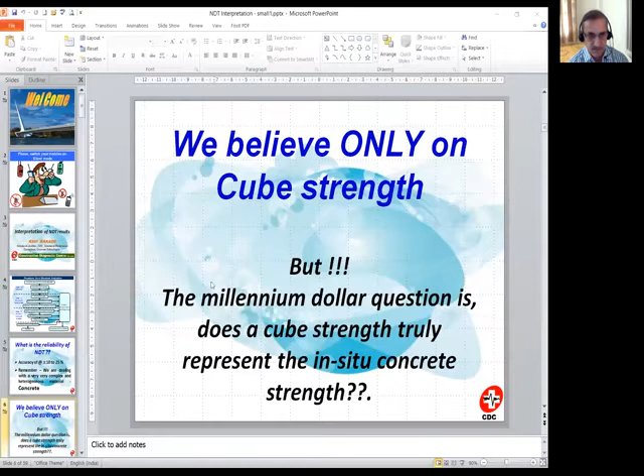Okay, hello, welcome you. Can everybody see me? Okay, I will straightaway start with my presentation. Okay, welcome and good afternoon, everyone. Hope today we don't face any technical issues.

Today I'm going to discuss mainly the interpretation of non-destructive testing results. Why have this session? I've been practicing in this field for more than 33 years, mainly as a structural auditor and NDT consultant. Sometimes we get responses from clients or consultants that they have issues with interpretation of NDT results, or they doubt the total reliability of NDT itself. That's why I thought we need some interaction with all the technocrats, and that's why today we are here to discuss more on interpretation of NDT results.

When we think of going for any structural evaluation or NDT, normally we should go in a stage-wise manner. In the first stage, we should establish our aims and what information is required. Then we should have a document survey - collection of architectural drawings, RCC drawings. If the project is new, then study of testing reports like mix design reports or cube testing reports. Then we should have a preliminary visit to the site, and during this visit collect the issues at site and some basic information. Then we should decide what next action we need to plan.

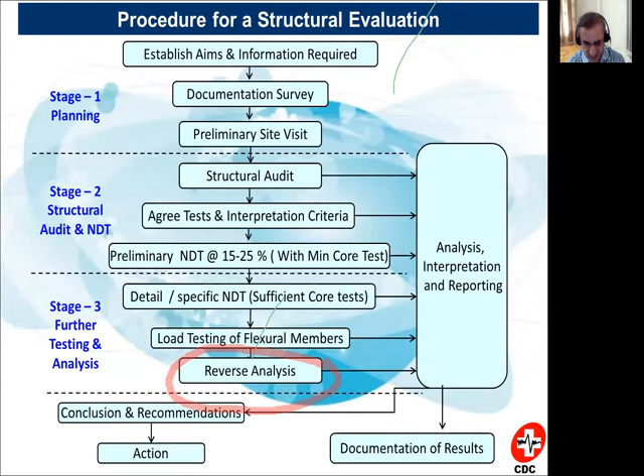Many times, as I said, people ask us what is the reliability of NDT. Many times this question is being asked.

If you ask me what is the total reliability of NDT, we can say it can have an accuracy of around 10 to 25%. But when I say 10 to 25%, it means it is assumed that you are carrying out a very systematic NDT survey, or NDE, non-destructive examination, which includes NDT.

So herein, we have properly identified the problem, we have properly identified the test, then the test agency has done the entire NDT program in a very systematic and professional manner. He has collected a lot of data from site which affects the NDT test results, and we have sufficient test samples available with us. If we have done everything in a very precise manner, then we can say the accuracy of these NDT results will be around plus minus 10 to 25%.

And if something goes wrong, or if the sampling size is very less, we have not identified the correct test, selected the wrong test at the wrong location, not taken sufficient data from site which affects the test results, and not applied correction factors for environmental or other conditions, or the test itself is not properly carried out at all, then this accuracy can go even as high as plus minus 50%.

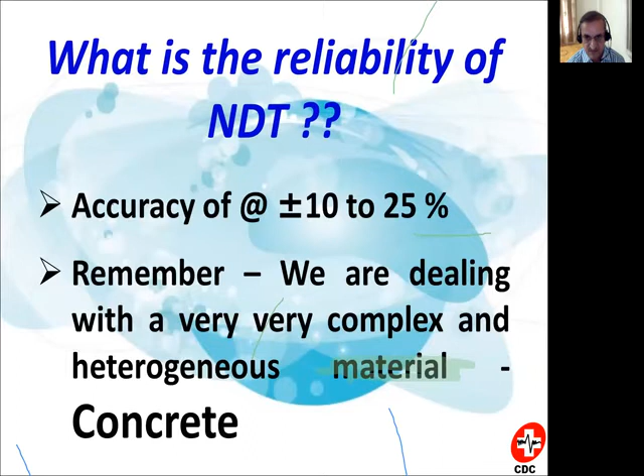Now my question is, when we say that NDT has an accuracy of plus minus 10 to 25%, I ask many people: do you believe your cube strength results are accurate? Do we say the cubes we test have a reliability of less than 10%? And the answer is straightaway no.

The millennium dollar question is: does cube strength truly represent the in-situ concrete strength? I've been practicing in this field for more than 33 years, and if you ask me, can anyone find the exact intrinsic in-situ strength of concrete, I will tell you no, it's not possible. No one can find a very accurate intrinsic in-situ strength of concrete.

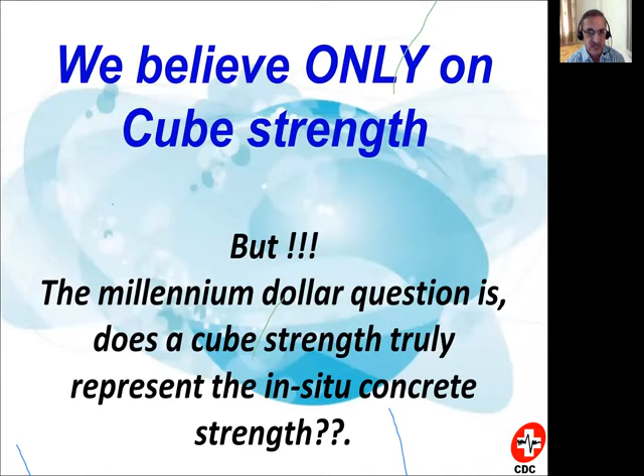What we are trying to get is a near about figure. Even when we talk of cubes, remember they are cast in very idealistic conditions and don't represent your in-situ strength. The cube results, tested under idealistic conditions with specific norms, give what we call the potential or probable strength a concrete can achieve at site.

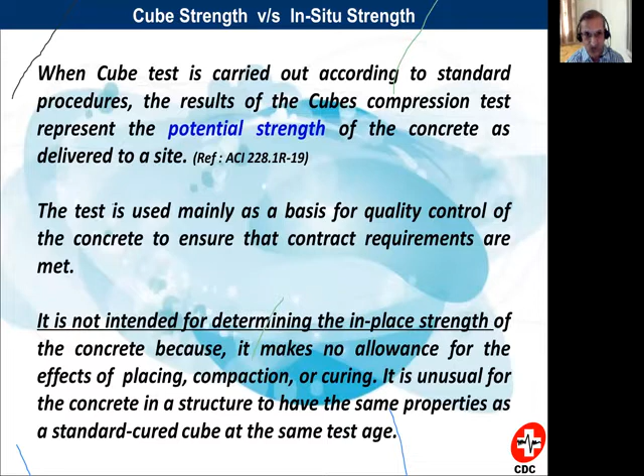This cube test is mainly used as a basis of quality control of concrete, not to identify the exact site strength. This test is not intended for determining the in-place strength of concrete because it makes no allowance for effects like placing, compaction, and curing. We know at site many parameters don't match the cube casting and testing procedure, so it is not possible that cube results will give a reliable value of what is recorded at your site.

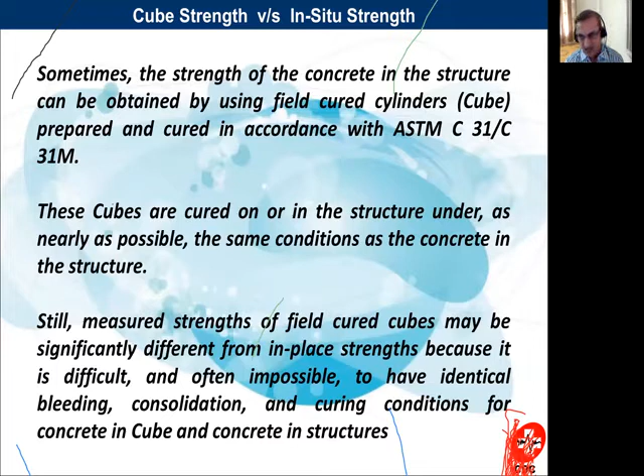Now we will see some of the parameters on which cube strength depends. This is a very vast topic, so I am not going into detail. If anyone is interested, at the end of my presentation I will show my email ID and website address, where you can find a detailed paper on the real reliability of cube strength results.

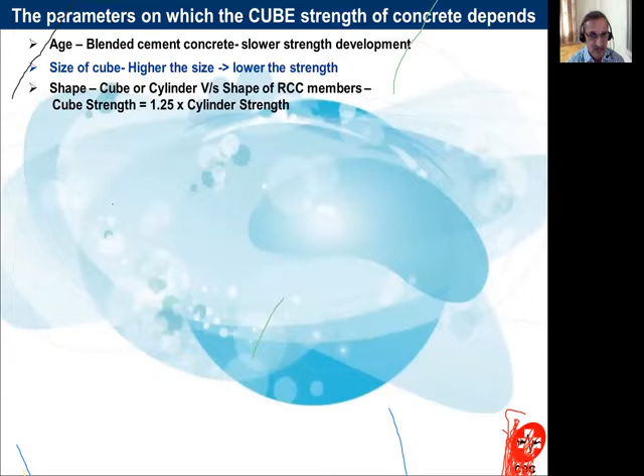Cube strength is dependent on age, on the size of the cube, on the shape of the sample, whether it's a cube or cylinder. It even matters what kind of mold material you have, whether cast iron, timber, or PVC. It depends on number of compaction blows, number of layers, compaction height, diameter of rod, and very importantly, curing temperature.

Your curing tank should be at 27 degrees plus or minus, but nowhere in India, except a few labs, do we have this curing temperature control at site. Then there's curing period: 28 days for cubes in laboratory, but at site the code recommends curing for 10 days for OPC and 15 days for blended cement. I have observed that I hardly see curing being carried out systematically at any site.

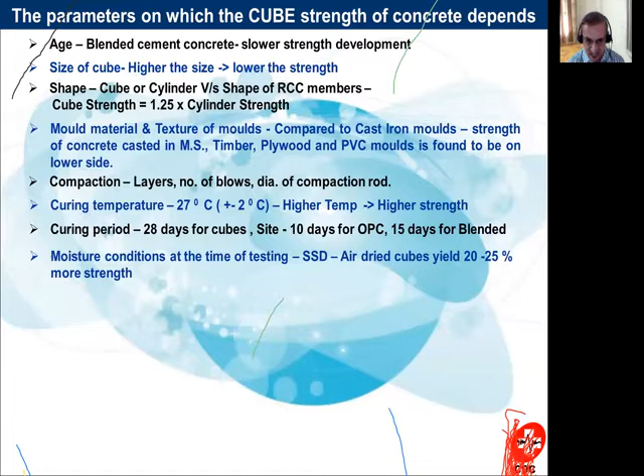The speed with which presently we are doing all construction concreting, hardly within a span of 8 to 10 days we are going with the next slab. It's impossible to follow a methodical curing. Hardly maybe 1 or 2 days max, the site concrete is cured. And that is very important, that your site concrete is bound to have a lower strength as compared to your cube strength. Then moisture condition is very important.

The cube has to be tested in saturated surface dry condition. Again, I am very specifically making a statement. Hardly any labs or any sites I see that the cubes are tested in saturated surface dry condition. Most of the time they are tested in dry condition.

Then another important factor is the compression testing machine. It should be a rocker roller plate. Many times we see at site we use hand operated machines, which are not at all recommended. Then another factor is direction of casting and direction of testing.

And the most important factor is the rate of loading. The IS code specifies 140 kg per centimeter square per minute as the rate of loading. But in the field, we have done a lot of R&D on this, and we have seen that in reality this speed goes as high as 500 to 1500 kg per centimeter square per minute. And if you have such a high speed, then your cube strength is going to be as high as 30 to 55% higher strength.

So simply if we collect 2 or 3 factors out of these 11 factors, you will notice that cube results may vary even to the tune of around 30 to 80, 90%. And these results are not minus - most of these factors are on the plus side. So out of these 11 factors, even 3-4 factors, there could be a possibility that your cube results are going to be high, even up to a tune of say 20 to 50%.

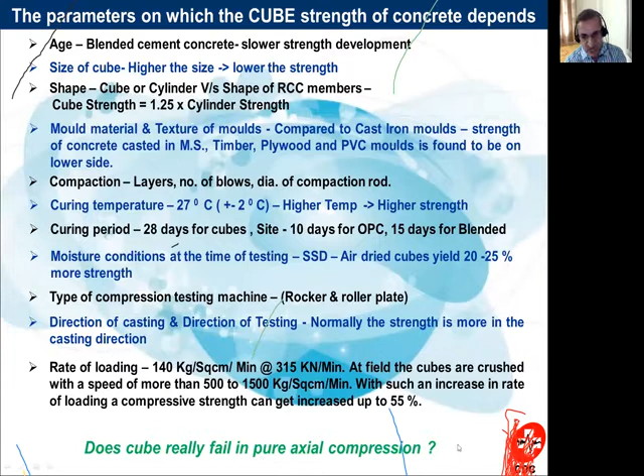So once we decide that we are going ahead with non-destructive testing, then it is desirable that all the concerned parties should sit together, and before we chalk out even an NDT program, we should decide right from which tests are to be carried out, how many tests are to be carried out, what is going to be the acceptance criteria, what are going to be the limitations at site, and ultimately what we are going to conclude from these test results. That needs to be decided before we start with any NDT program.

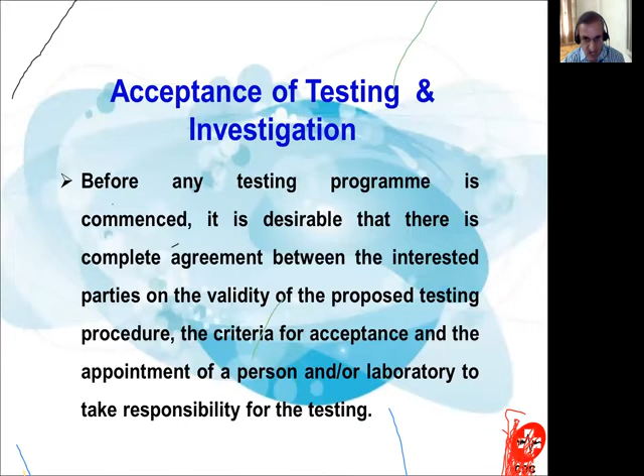Remember that NDT is not the only diagnosis tool. It has to be a total comprehensive NDE, non-destructive examination program. So in that, NDT is one of the tools. Structural audit, reanalysis, laboratory testing - all comprise of the entire analysis. And NDT is one of the tools.

And that's why NDT results are not the only final values, and they should not be taken as the only mathematical values. And of course, if we are saying NDT is not a final value, nor should the cube strength result be taken as final.

I see that many times in India, cube strength is overemphasized. We believe only in cube strength, and we take decisions on all this site concrete based on whether the cube has passed or not. And even I see that there are many issues as to what to call a cube pass. If you have suppose M20 concrete, and if a cube is crushed at say 20.5, then I see that many times, most of the time, 90% of the time, people accept that cube, and that cube concrete is declared as accepted because simply it has crossed a figure of 20.

So there are many issues even with the acceptance of cube also. Actually, if we truly see, when we are talking of non-destructive tests, there are n number of methods available in the market. Maybe around 20 to 30 different test procedures are available. Out of that, only one test is going to give you the actual in-situ compressive strength, and that is the core test. No other NDT test is going to give you the direct in-situ compressive strength. They are indirect measurements of the compressive strength.

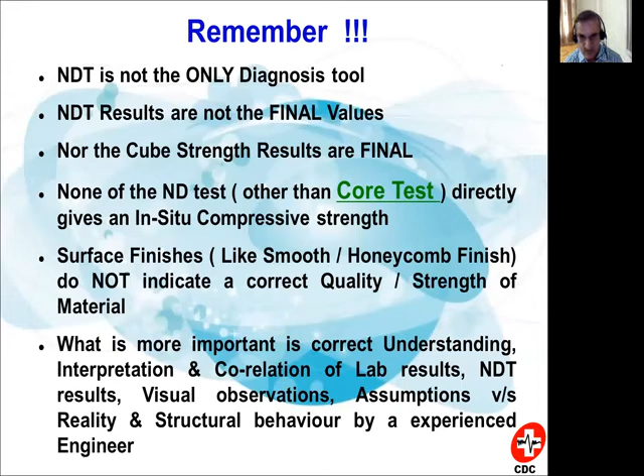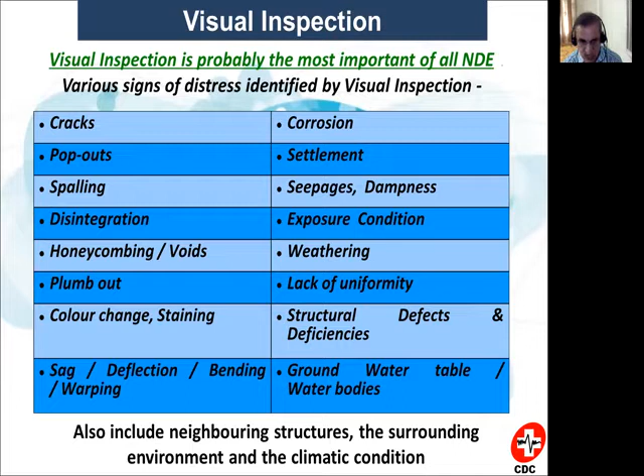Now coming back to NDT results, the accuracy and reliability of NDT mainly depends on proper selection of NDT tests. It becomes very important which test you are selecting.

Just to give an example, suppose you're testing a machine foundation or a turbine foundation of around 10 meters by 8 meters by 5 meters, and if we recommend rebound hammer as a test, something is going wrong. The rebound hammer has a limitation of scanning only around 25 to 40 mm of surface concrete. This is not a test to be recommended on very solid or very thick members.

This test may be useful for members like slabs, columns, or beams, but it is not recommended for foundations. So before we start this entire NDT program, we need to have a detailed, thorough dialogue and chalk out a detailed program, select a proper test, then proper surface preparation for every test is very, very important.

I see that many times people don't even open the plaster. They simply conduct the rebound hammer test, ultrasonic test, or even half cell potential test on the plastered surface. It's 100% going to give you a wrong result, and then your interpretation is going to go haywire. It's not going to match your reality.

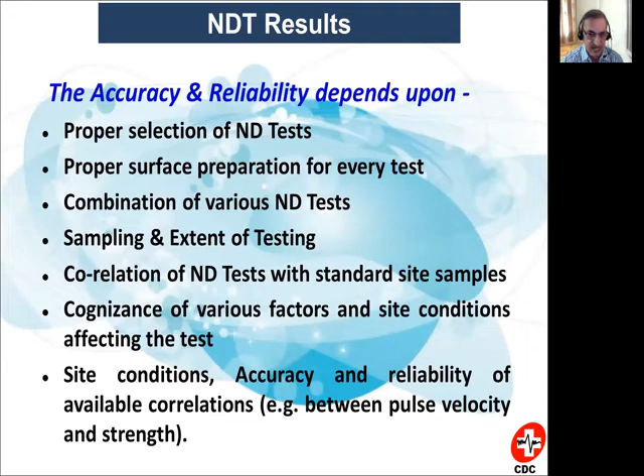When we are going to carry out NDT, we need to study the history of the structure. Because if I am going to conduct a half cell potential test, I should know what kind of repairs have been carried out in the past, whether the steel has already been protected with anti-corrosive treatment, before conducting the test. If this history, especially of repairs, is not studied, you are going to collect wrong information from site and interpret it wrongly.

I would always suggest that we should have a comparison, because all these NDT methods give very good interpretation if you compare two results. First, conduct the NDT where you have a defective member, where there is an issue, and then straightway compare that member with another member where probably there is no issue. For example, one lot's cube strength may not be passing while another lot's cube strength is passing, so you can take this as a comparison and compare the results of these two tests.

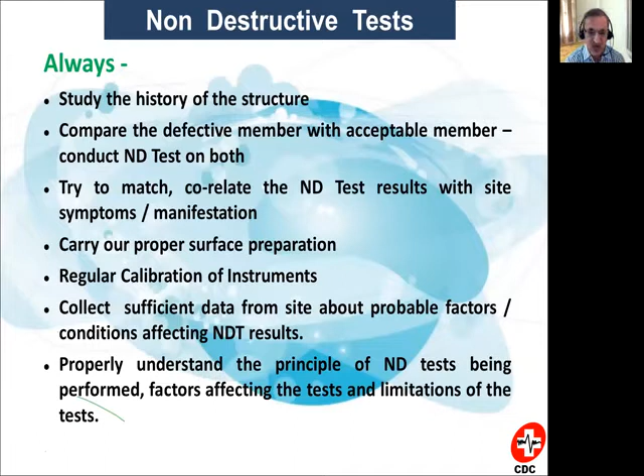I see very casually people select points anywhere and take a reading - maybe hardly one reading is taken on the entire member - and then you land up in a problem. As I said, we should always combine two or more NDT methods.

The recommendation I would give is you should combine rebound hammer with ultrasonic pulse velocity. Rebound hammer plus ultrasonic plus core is the best combination.

For corrosion mapping, you should combine half-cell potential and resistivity. Again, the best combination is to combine half-cell potential, resistivity, carbonation, sulfate and chloride tests. This is the best combination you should go with for identifying a corrosion problem.

If you are testing a pile, then you should combine pile integrity testing plus ultrasonic plus core. I will explain here why we need to take ultrasonic for pile integrity testing.

Everyone should know how the pile integrity test works, and what is the basic principle on which it works. Normally there is an input where you should know the depth of pile. If the depth of pile is known, then you know the transmission time, and based on that, the software will calculate the velocity of that concrete. That velocity is used as an input, and based on that velocity, the entire integrity of the pile is mapped, and the issues or locations are identified.

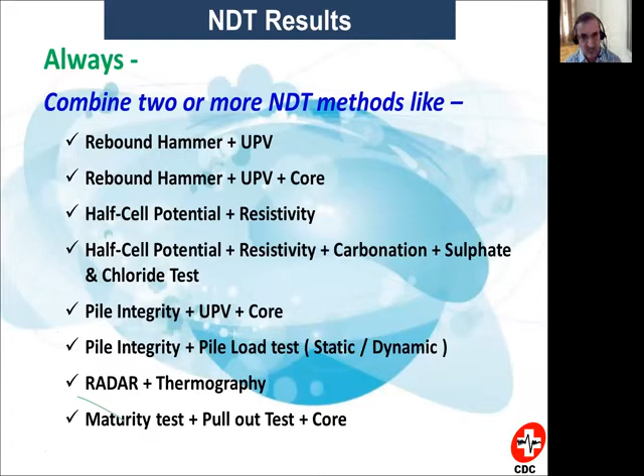The selection of type of test is very important—we need to select the right type of test, take the right sampling, and decide how many tests are to be conducted. That will depend on the type of structure, its use, importance, size, and location of the structure or that particular site. Suppose the site is located in Mumbai, a coastal area, then tests for corrosion mapping could be different. If the site is in Pune or Nagpur, which are very dry areas where carbonation is likely, I would select different tests.

Sizes of individual members also need to be taken into account—what is the thickness of that particular member, and is there going to be a limitation? Suppose you're checking a windmill foundation with sizes of around 10 to 15 meter diameter and thickness of even 1.5 to 3 meters. In such cases, ultrasonic testing has limitations, because most available ultrasonic machines can scan only up to around 8 to 10 meters depth. So if you have a foundation of 15 meters, ultrasonic is not going to travel that far—then you have to go with a semi-direct method. So type of test can also be decided based on size.

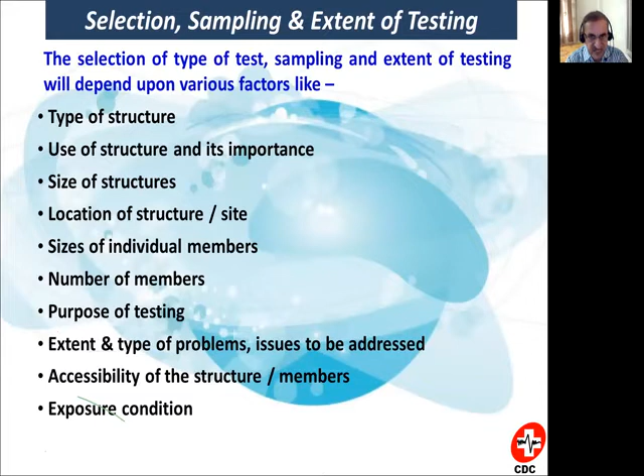We should also know the exposure condition—whether the plant is located in a chemical area, a mechanical industry, or exposed to any aggressive exposure condition. All this data should be known beforehand, and then we select the type of test, how many tests, and where they are to be conducted.

That also includes the type of ND test being performed and the number of ND tests being combined, factors which affect the test, applicability of the test, and sometimes even availability of NDT instruments. You may want to test a foundation of say 15 meters, but no ND tool is available for testing such a depth. So you'll have to identify these issues, and the important issue is the economy of the entire testing program—this needs to be compared with the cost of proposed repair and rehabilitation.

Unfortunately, it happens in India that NDT is given a very low priority, and hardly a fraction of amount is allocated to this entire NDT program, which is the crux of your entire investigation. So a very small amount is allocated.

Maybe hardly, sometimes we get a call that a building is around 30-40,000 square feet. I'm giving an example of old society buildings where we are giving stability certificates. When we give stability certificates, I think NDT has to be a mandatory process. How can we simply, on visual or clinical observations, declare that a building is structurally safe and stable?

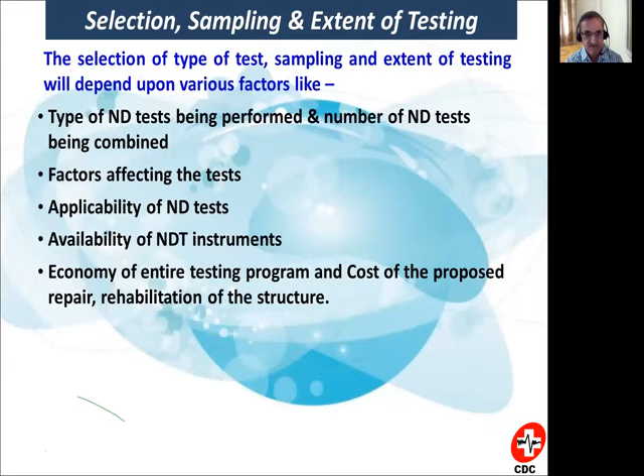These are some of my recommendations on how many testing samples or tests we should conduct. First we should know the reason for testing, why we are conducting it, and then I'm recommending some minimum number of members that we should test.

Suppose this is routine testing as quality control. I strongly recommend using non-destructive testing as a quality control tool. When your structure is under construction, right from day one when you're casting your cubes, you should start collecting NDT data. That becomes perpetual data available with you. If you have correlated concrete data from the casting stage, then even later, say 5 or 10 years afterward, if we find something problematic, we have that data available and can straightaway compare it and use it as a correlation chart for the problem at that time.

I strongly recommend that each and every project should have 5 to 15% NDT testing as mandatory. If the project is too big, maybe 5%. If the project is small, maybe 15%. If cube strength is not passing, then maybe we go with 25 to 50%.

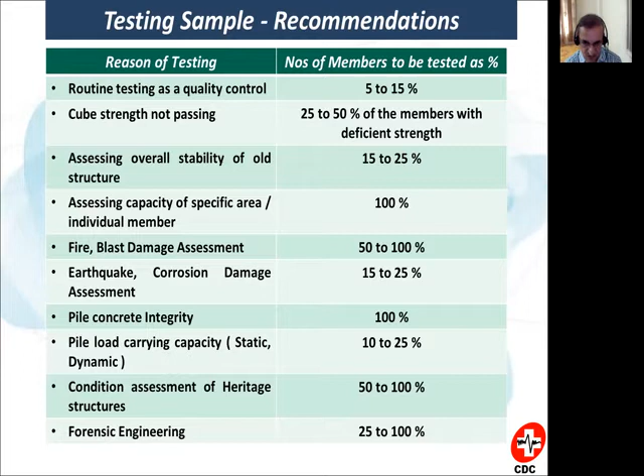If you are doing forensic engineering, where something has gone wrong, a structure has collapsed, and you need to do a root cause analysis, then in such cases also you need to do testing of 25 to 100% of structures.

Then, how many tests per member or per length should we use? For rebound and ultrasonic test, I recommend at least 1 point per 1 meter or 1.5 meter of length should be used.

Same, if it is a half-cell potential or resistivity test, I would recommend 1 point per half a meter to 1 meter. Or if it is a slab, then for say 100 square feet area, 10 square meter, we should use at least 3 points.

If you are testing core, then I would recommend minimum 6 to 10% of the total points that we used with rebound and ultrasonic. So suppose you have tested 100 points with ultrasonic, then you should extract at least 10 cores.

If you have tested 1,000 points with UPV rebound hammer, then you should extract at least 100 cores. There are codes available.

Especially the European code 13791. That code talks of assessment of in situ compressive strength in structure.

I would recommend everyone that this is a very important code, and you should refer to it for how many samples you should have. Of course, this code talks of sampling for core.

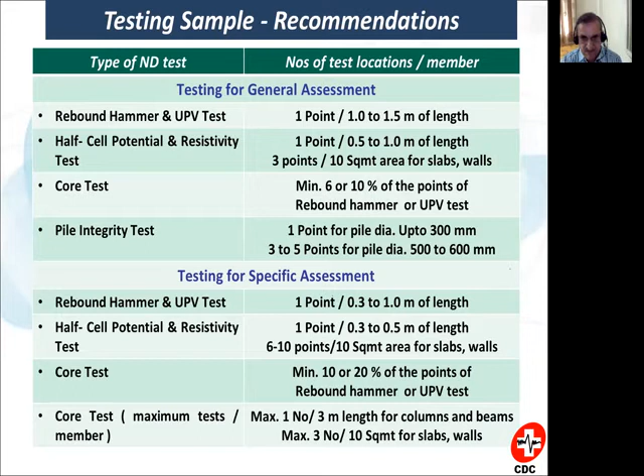Typical scenario is where your NDT results do not match site observations. As I said in my earlier discussion, there are some cases where people report that NDT results are not matching site conditions.

The first typical case is: the NDT report indicates a very low strength concrete, but there are no site observations such as cracks, crushing of concrete, or deflections of members. This is a very typical situation.

In older structures where the concrete used to be M15, or even for new structures which have very high strength, we have n number of cases where the strength at site is observed to be as low as 1/3 to half of the required strength.

And when such an NDT result is produced, a doubt is raised that something is wrong with the NDT. How is it possible that the strength is 1/3 and still the site concrete or that member has no crack? By that strength, it should have crumbled, crashed, or collapsed. This is a very common comment made at site.

I'm going to come to this, let me check whether I get sufficient time. I will show you one example. I've prepared one table over here.

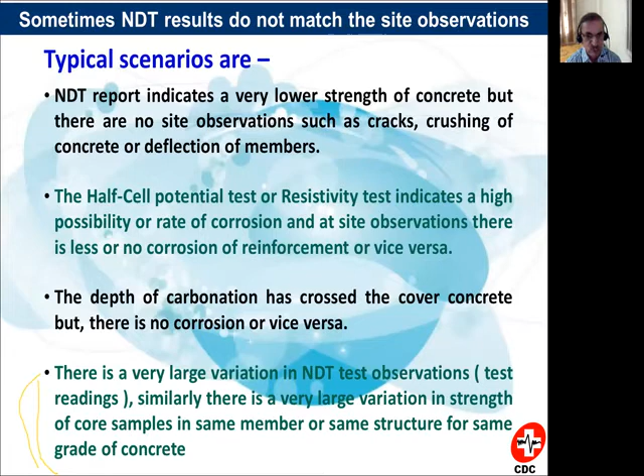And this is what I'm talking about, the heterogeneity of that concrete. Then there could be some issues even with the testing procedure itself. So we need to identify why these results do not match. First I am saying that there are issues with some sites. Now I am trying to identify what the issues could be. There could be issues even with the NDT testing procedure. Suppose incorrect selection of NDT test, as I have given an example already, that use of a standalone rebound hammer test is recommended on a large foundation.

Remember, if there is a void or total cavity inside a foundation, just at a depth of say 50 mm, the rebound hammer is not going to identify or detect such major flaws. So you should use a correct method. Incorrect surface preparation: already I have discussed this, that we need to open the plaster. We should never, never conduct a test on a plastered surface. But as the tender was got with a very small amount, or on the lowest basis, I see that NDT consultants don't even remove the plaster. They say, "Yaar, we are not getting paid at all, where is the money to spend on removing plaster?" So this is how things go wrong.

Then incorrect test method. I will give you an example for slab testing. If you are testing a slab with ultrasonic pulse velocity, you have to use the direct method for probing. I know for the direct method of probing there are going to be limitations, because from the bottom you need to remove the plaster. If it is a regular floor, then you need to remove the tiling, or if it is a roof, then you need to remove the waterproofing at the test location area. Yes, but that has to be done. If that is the correct method, then you have to do that.

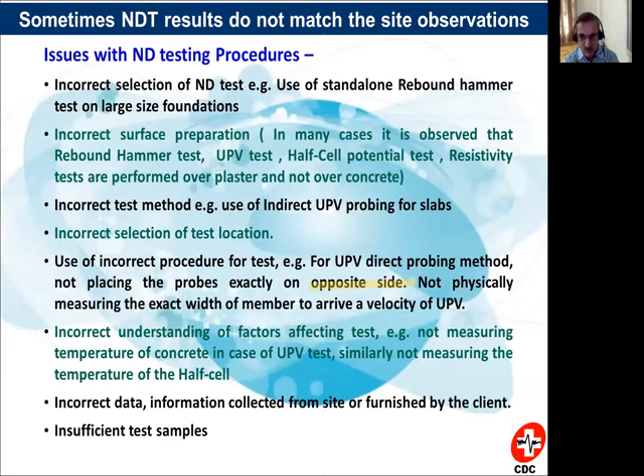Then there's incorrect data collection—information collected from site or client not given correctly, and insufficient test samples. I know we are already running over the scheduled time of 4 to 5:30, so I'll take only one or two more slides and then stop.

There could also be issues with the non-destructive testing procedures themselves—non-calibrated or faulty instruments being used, inexperienced test personnel, lack of understanding of testing principles, and not combining associated or supporting tests. Here's a very important example.

Suppose you are conducting a rebound hammer test where carbonation is present, which affects the rebound hammer substantially. If the concrete is carbonated, your rebound numbers can be as high as 30 to 40, even 45% higher. So in such cases, you need to conduct a carbonation test along with the rebound hammer test. I think for rebound hammer testing, the carbonation test is a mandatory associated supporting test—you should not conduct a rebound hammer test without it. Otherwise the results will be totally wrong, totally wrong.

Then, variation in test locations when combined with non-destructive testing.

Theoretically, this is how a systematic NDT program should be done. First, you should carry out indirect methods like rebound hammer and ultrasonic at specific locations. Conduct a big sample size, say 100, then find the highest and lowest values and distribute the number of cores, say 10%, across this distributed range of ultrasonic readings.

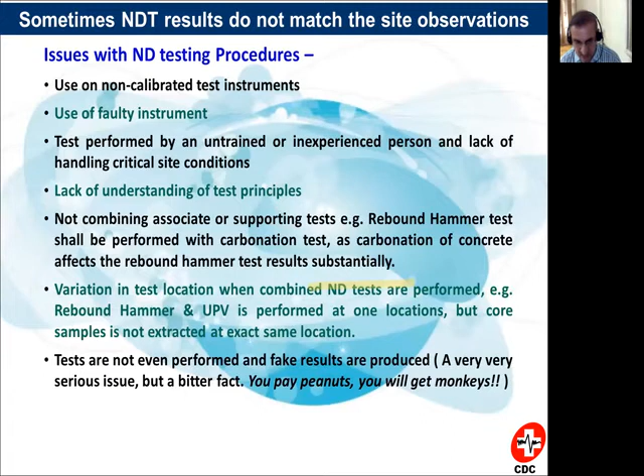Okay, I think time is very short. I'll try to cover one or two points and let us see how we can conclude.

So, issues with incorrect assessment and interpretation: blind use of strength correlation graphs. I already mentioned the use of graphs for rebound hammer. Also, not using or applying various correction factors.

It's very important for different site conditions, materials, and environmental conditions - temperature, moisture, stresses, carbonation, cover depth - a number of factors you're required to collect from the site.

The NDT laboratory should have developed sufficient correlation charts or correction factors for temperature, moisture, stresses, carbonation, and so many other factors. The rebound hammer calibration for OPC cement and rebound hammer calibration for blended cement are not going to be the same. You cannot have a single graph - you have to have different graphs.

If you're using ultrasonic, the stress factor is very important. You should have a stress factor available with you and know what it is and how it's going to affect results. The stress factor affects velocity by a tune of around 15 to 40-45%. The velocity is reduced simply because of stresses.

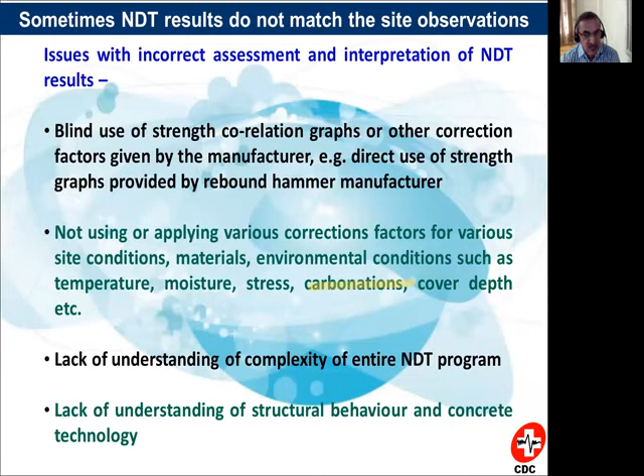You should know how to identify these stresses and apply a correction stress factor. Then there's a lack of understanding of the entire complexity of the NDT program, and a lack of understanding of structural behavior and concrete technology. There are issues where we don't know exactly what the concrete is.

Sometimes there are issues with interpretation on the client side, or if it's a structural engineer or agency who formulated the program, there could be a problem at these locations too - not properly identifying the proper test. The agency deciding the program has not identified the correct test, has not done the correct root cause analysis, and has not correctly identified the type of test to be performed or how many tests are to be performed.

Most of the time there is insufficient test sampling. In most cases, the NDT program is decided very casually, without going in-depth about why NDT is proposed or how it should be done.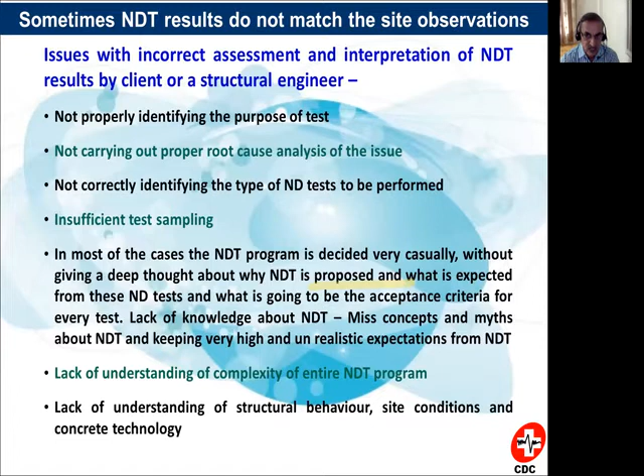Then there's a lack of understanding of the complexity of the entire NDT program, lack of understanding of structural behavior, site conditions, and concrete technology. I repeatedly say concrete technology because people take concrete very casually and don't know exactly what the strength is - when I talk about characteristic strength versus in situ strength, what is the difference? There are a number of issues we should understand.

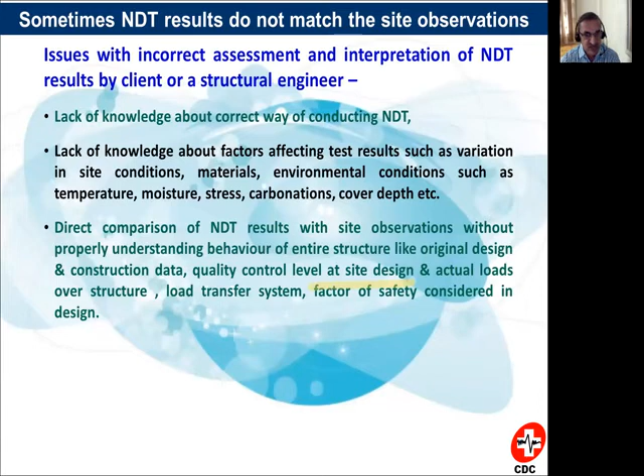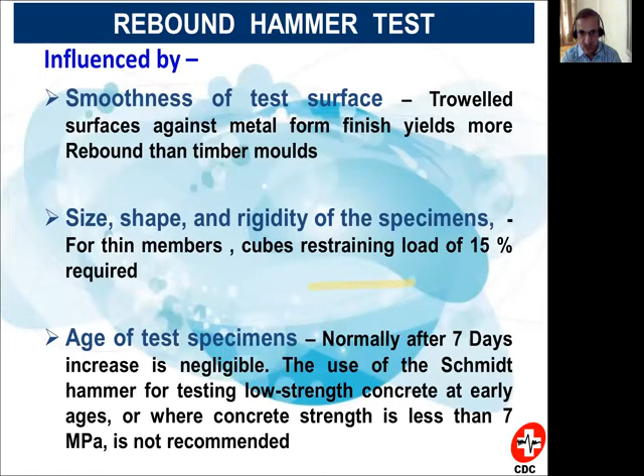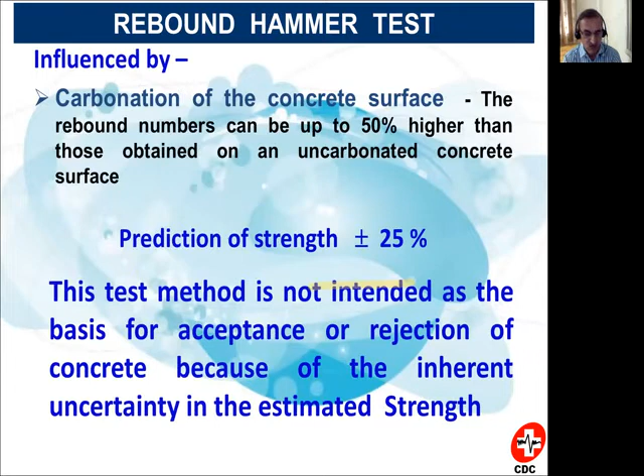Then there's a lack of knowledge about correct ways of conducting tests. I will skip some of this and go to one or two slides and then stop. This paper is also available on my website - you can refer to it because this is actually a very vast presentation that I'm trying to cover within 1.5 hours, when it normally requires more than 4 to 5 hours. So I'm simply skipping these slides - you can refer to my website where you'll get all these details.

Now, for ultrasonic, the code has been revised. Earlier, the NDT methods were available under code 13311 part 1 and part 2. Now part 1 is totally scrapped, and the IS code committee is coming out with a different code. 516 is now being totally revised, and under 516, part 5 is going to cover all the NDT tests. Out of that, section 1 is now declared for ultrasonic.

Rebound hammer - the draft code is already being published, and anytime you may expect that code. Core testing is already covered in 516 part 4. Half cell potential test is also now going to be covered under this section in parts 5 and 6. So please refer to the correct parts.

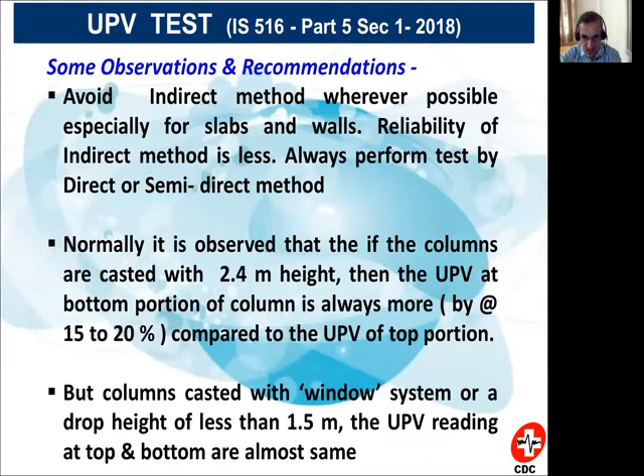Some recommendations test-wise I am already highlighting here - I am not going in detail. Now straightaway I will shift to...

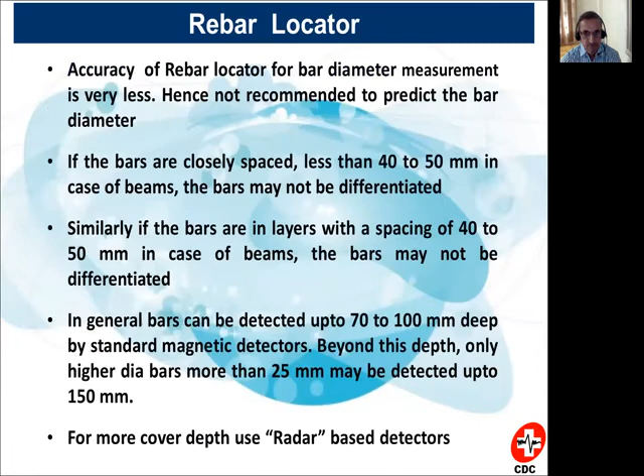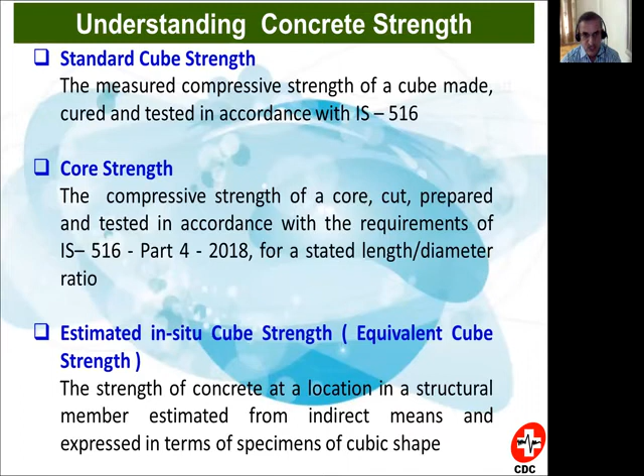These are some definitions I think we should be familiar with. What is standard cube strength? What is core strength? What is in situ compressive strength or equivalent cube strength? What is potential cube strength? For that, I have referred to BS 6089 - you can refer to that code. Actually, 6089 is very similar to the European code 13791.

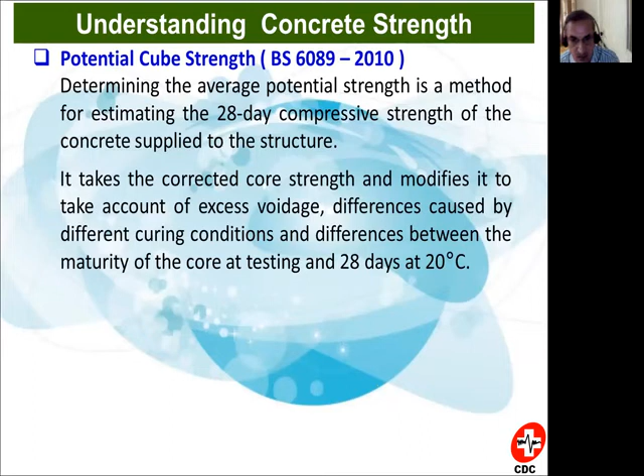Maybe you can note down some of the codes which are very important. Already I have given two: first is EN 13791, second is BS 6089. Then ACI 214R, ACI 214.4R - R stands for revision. I am not telling you the latest years, you can check on website. Then ACI 228.1, ACI 228.2, ACI 437. So these are some of the very important codes which you should refer when we draft this entire NDT plan.

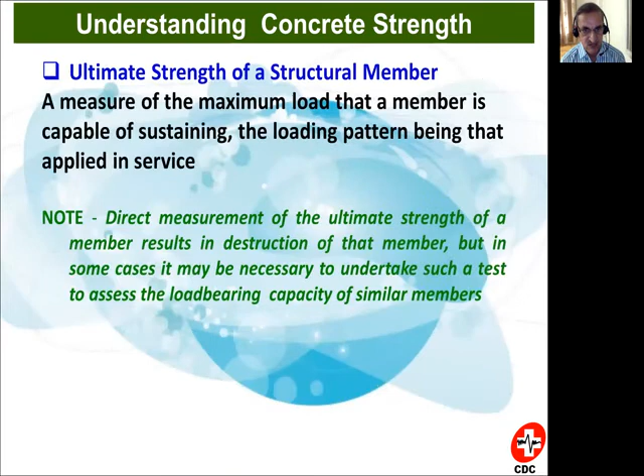Yeah, I will show you this one slide and then I will stop. This is what I was talking in the beginning - I have given an example of a column which is 200 by 530 mm with 8 bars of 12 mm dia and Fe415.

Now, first two cases is where my design grade of concrete is M30. For that, suppose actual load I am having 850, MX I am having 40 kilonewton, MY 15, and there I am getting a stress ratio of say 0.9. Similar, same column with same grade, but now load is slightly less because MY I have increased. So 650 kilonewtons, 10 is MX. There is a mistake, it's not 250, it has to be 25 kilonewton meter, then stress ratio is 0.98.

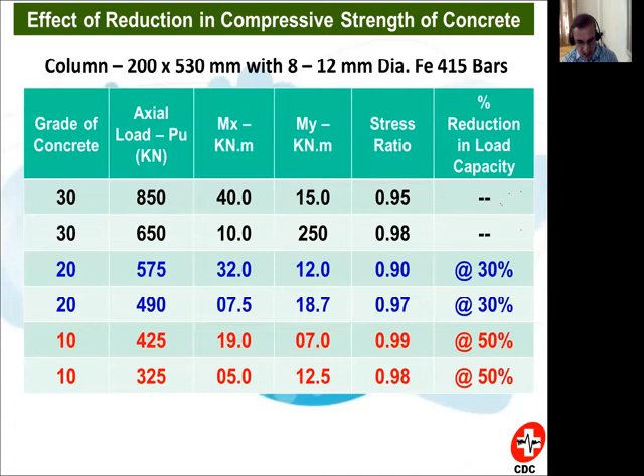Now suppose if we find that instead of M30, at site the concrete is M20. So the reduction in strength of concrete is substantial. But actual reduction in your load carrying capacity, when it gets reduced from 30 to 20, is only 30%, not more than that. Even if the concrete has reduced to say 1/3, that is dropped from 30 to M10, still your overall capacity reduction is not 66%, but it is 50% only. Maybe column could be a case where a reduction in concrete strength will give you some reduction in overall capacity.

But if you take the case of a slab, 4 by 4.5 meter span, 150 mm thick, if it is M30 grade and has reduced to 20, then hardly there is going to be reduction of 3%. If it has dropped down from 30 to 10, still there will be reduction of hardly only 10% in your load, it's not 1/3. And that's why I said that sometimes when people make loose comments that when concrete has reduced from 30 to 10, by the time it should have collapsed, it should have given cracks - no, it is not going to give you, especially for flexural member it's not going to give you.

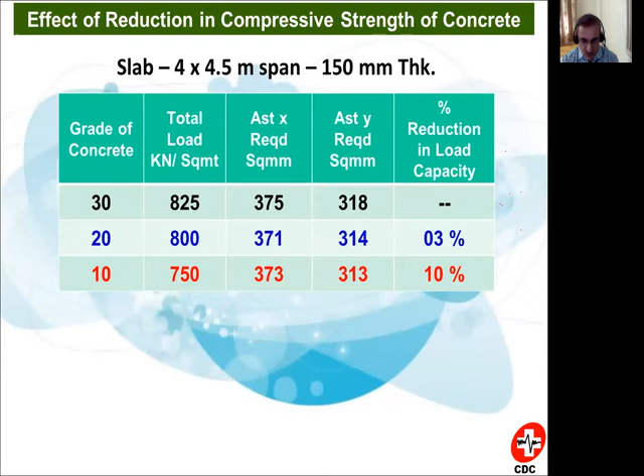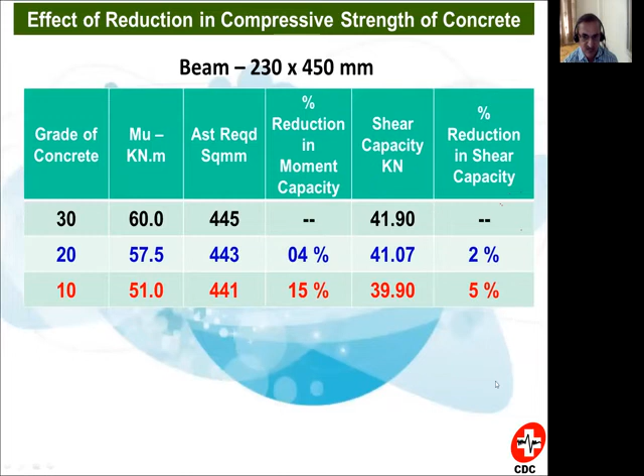Take an example of a beam, suppose it is 230 by 450. Grade of concrete, suppose earlier it was 30. Now the moment resisted could be say 60. For that, AST required is say 445. So for the same 445, even if it drops down to M10, the overall reduction in your moment is from 60 to 51 - it's only 15%, and it's not 2/3 reduction. So this is a point I think everyone should know.